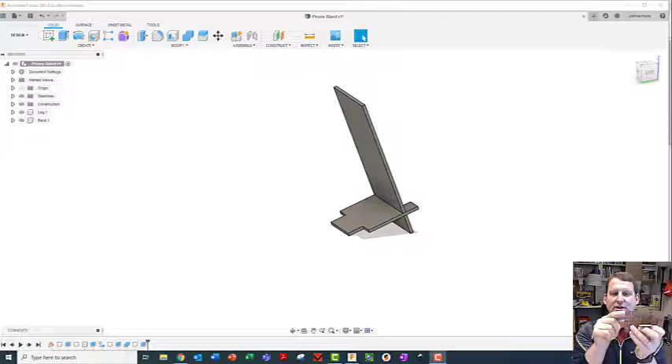Then we'll need to do some roundovers. What we find in real material, especially things like wood, is if we leave really sharp corners around the edges, they tend to splinter and break away a bunch. They're really weak when it's a really sharp corner. So we'll do a little fillet on all of our outside edges to round them over, and that'll make them much stronger and more resistant to chipping. You can see where this leg already chipped off, because it's so sharp - see how sharp that corner is? So we'll have the laser cutter round those over real quick. Some things we won't want to round over more than others, but we'll talk about that in a second.

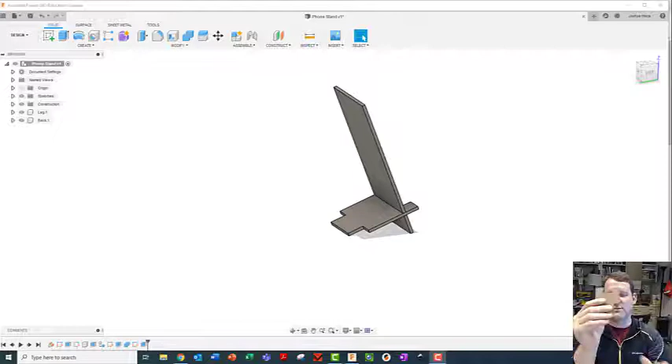All right, first things first, let's go ahead and cut this. Remember, I made this 2 centimeters from the bottom to this slot, so I want to do 2 centimeters from here to this slot too. I want to keep that balanced.

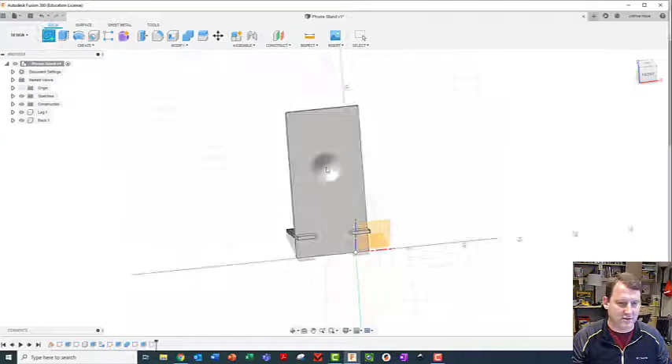So to cut this slot, I want to come over here to my face, create a sketch, click here. I'm going to do a construction line from the top to the bottom, and put my slot on the left - if you want to do yours on the right, that's fine. Notice I didn't actually draw a construction line - I'll hit escape, just highlight that line, and make it into a construction line. Totally fine way of doing things. Notice it's orange because I haven't defined where it's supposed to be yet.

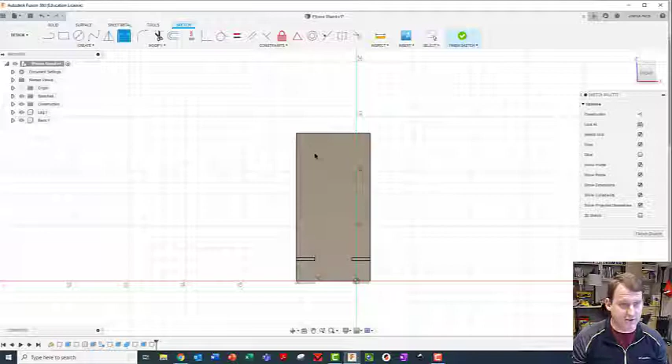So I'm going to use the D for dimensioning tool, click on the line and the side I want to go off of. I'm going to make that 2 centimeters. And that makes me happy. So now that's all lined up.

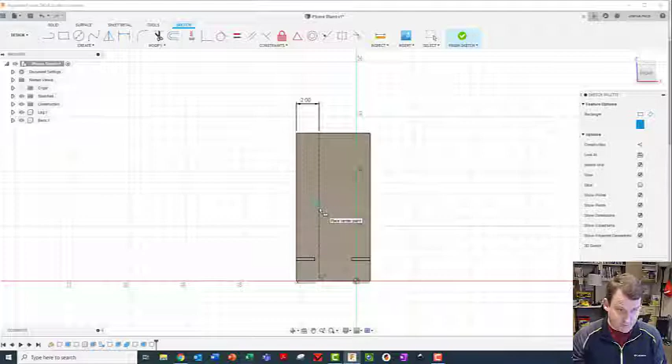I'm going to grab my center rectangle tool, and I want this slot centered on this line. So I'll go down to the middle until I find the little triangle, which tells me the center point. I'll click on it, and drag it up.

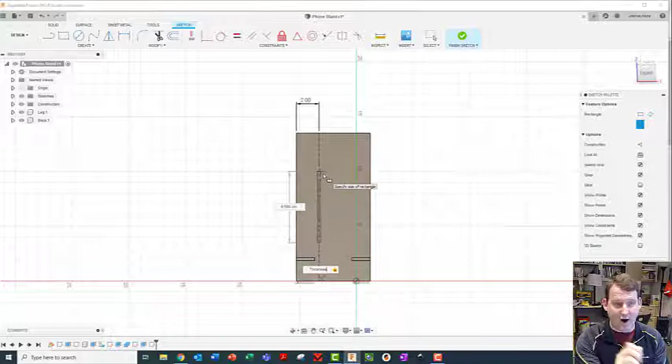Now, I want this slot to be equal to the thickness of the material - that's that bottom number that's blue right now. So I'm just going to type in the word 'thickness'. Again, what this allows me to do is change the thickness later for a different material, and it automatically will change all the slots and make everything just work for whatever thickness I have.

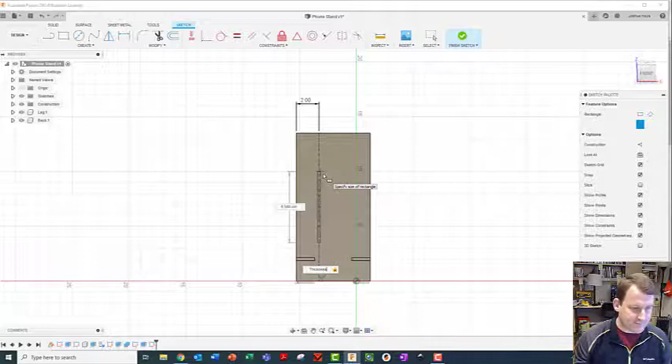And then I want the width. I made the width of this tab 0.6 - did I write that down? I think it was 0.6. So I'm going to make the width of this the same as the width of this. I'll hit tab, and say it was the back width, times 0.6. And I'll hit enter.

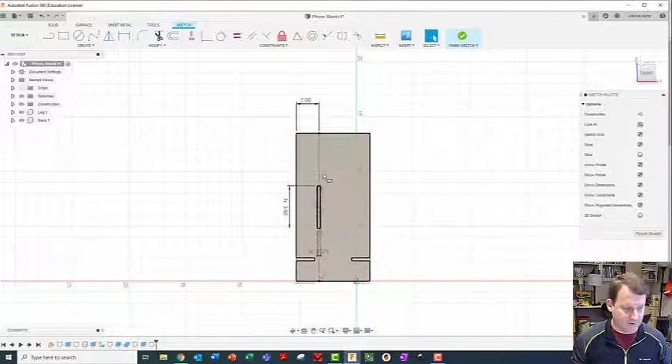Now you might be concerned - you might say, well, what if it doesn't fit because it's exactly the same width as the other one? The nice thing is when the laser cuts stuff out, it actually vaporizes a little bit of material. So the width of the hole is always going to be a little bit bigger than the thickness or width of the material. So it'll actually work out really well, I think.

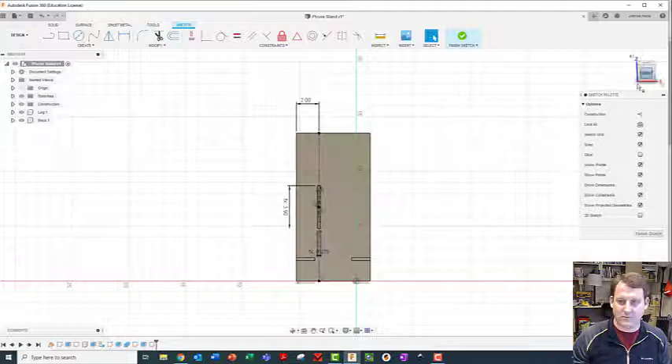Okay, so I have that done. I need to extrude the hole. So I'm going to hit E, select the hole, and push it back in. See how it turns red? That means I'm cutting, and I'm going to say, I don't need to go quite that far.

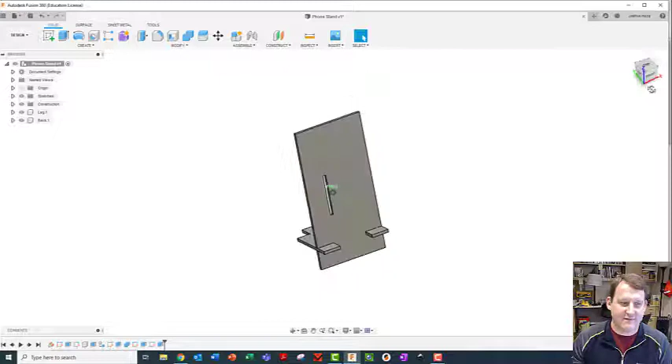I'm not going to get really blown away there, I'm going to say OK, and I've just cut that slot. So now I have my phone stand, and it's almost totally done. All I want to do is take these hard corners on the outside corners and fillet them, round them over a little bit. I'm going to do that right now.

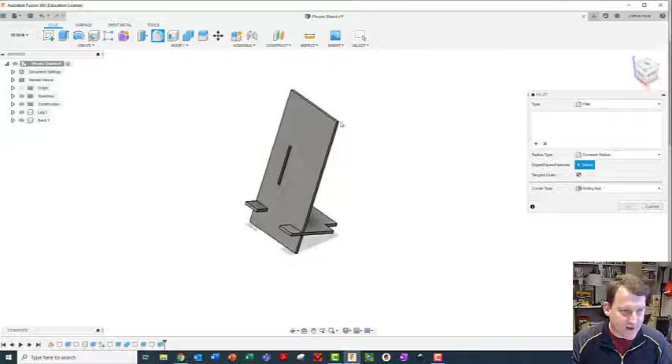I'm going to choose up here on Modify, go to Fillet. I could just use F. I'm going to rotate so I can see this edge right here. I want to fillet this, I'm going to zoom in. I want to round this over. Notice it has a little push arrow so I can round this over as much or as little as I want. I'm going to choose that quarter centimeter. You can choose more or less, it's just up to you.

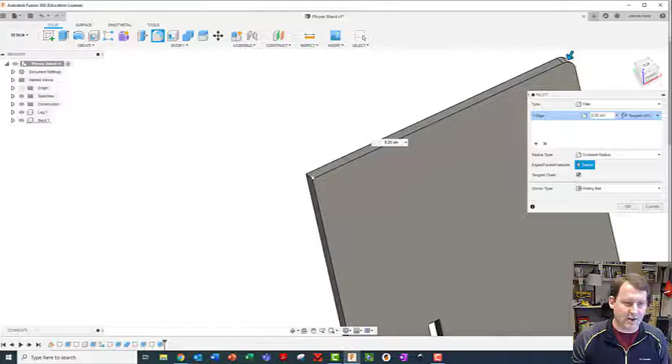What you need to do is just knock off a little bit so that it isn't quite so sharp and it won't chip up and damage as much. So I'm going to come over here and click on this edge now. Whoops, I'm going to Control Z, undo that. I did not want to click that quite yet.

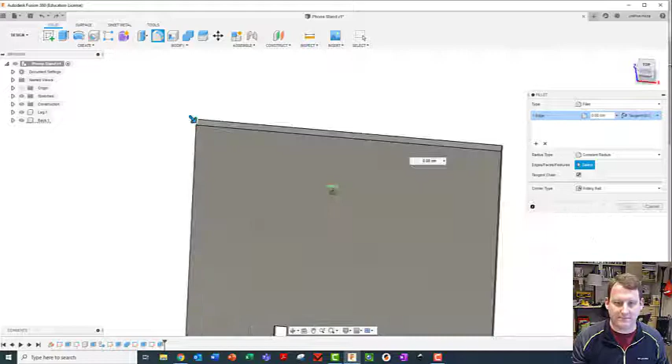Modify, fillet. I'm just going to come through here. I'm going to select them all before I put a value in. So I'm going to click on that one, click on this edge, zoom out. I want to do this bottom edge here. Whoops, right there. If you click on something that's wrong, like if I clicked on this on accident, I just click on it again and it goes away. All right, so I can do that. I'm going to click on this edge here.

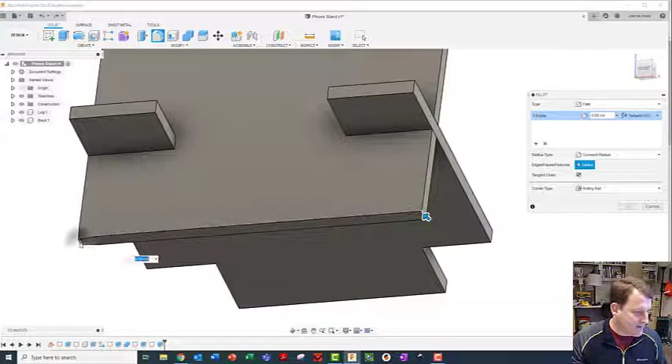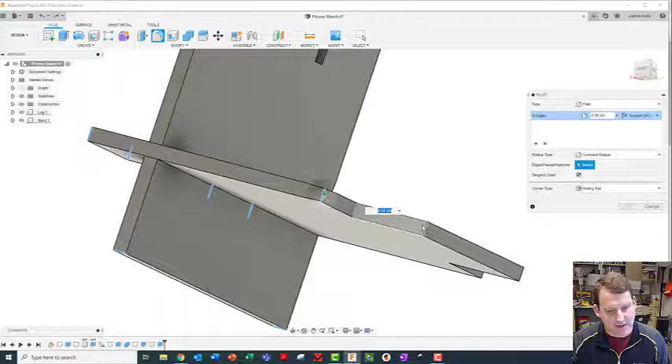Now I don't want to round over these edges because I like this idea that it's a nice smooth line through here. So I'm not going to do those, but I do want to do this outside edge, this one, and the back of the leg as well. So I want to round over this outside one, this one, that edge, and then one more right there. I don't want to round over any inside corners, so this corner I don't want to round over. That would be a bad thing, it would make it not sit flush.

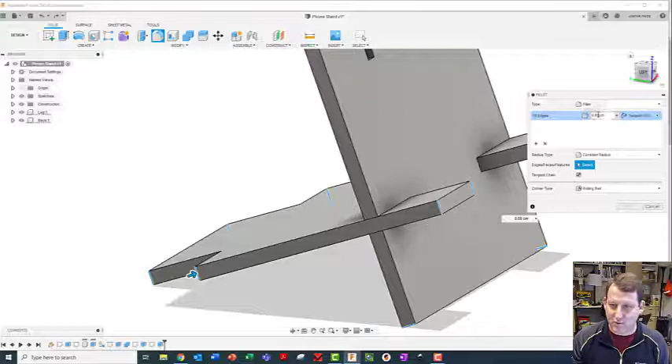And then I'm going to make sure I think I got everything. If I didn't, I'll get it later, but I'm going to give it a value, and I'm going to use that quarter centimeter. But again, it's really just looks, so it's whatever you want it to be. I'm going to click OK. I think that looks pretty sharp.

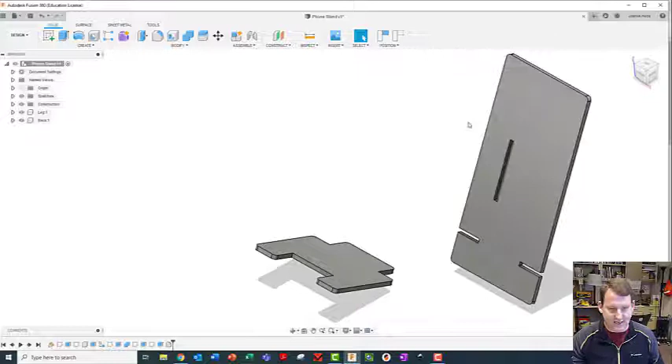I'm going to hit my home button, make sure that all my edges are rounded. So, whoops, I just moved that - I just moved it and screwed it up. So instead of trying to get it back just right, I just go Control Z and keep going until it goes back. I'm totally fine doing that. Okay, so yeah, I think that's all rounded over nicely.

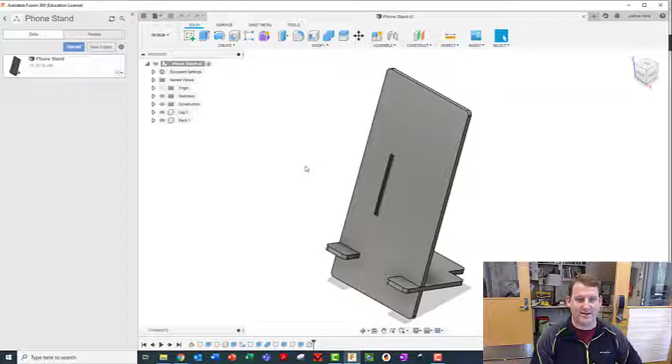All right, so that's the major part of the model. Now it's for you to add your own details. So, I don't know, maybe I'd want to do something else to my stand. Maybe I want to cut a hole for decoration or something. I want to just mess around with some stuff.

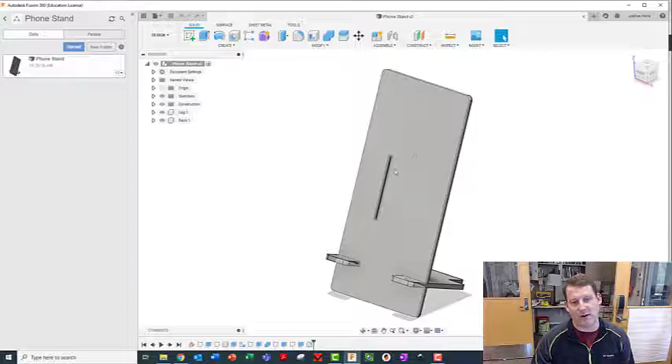Or maybe I've got one of those PopSockets on the back of my phone, and my case has some thing on the back of it that's going to get in the way of it sitting flat. So I might want to cut a hole for that. Make sure you don't make anything really thin. So if you were to cut, say I were going to cut a hole for something, and I made it like the hole was this big, and I extruded this hole out.

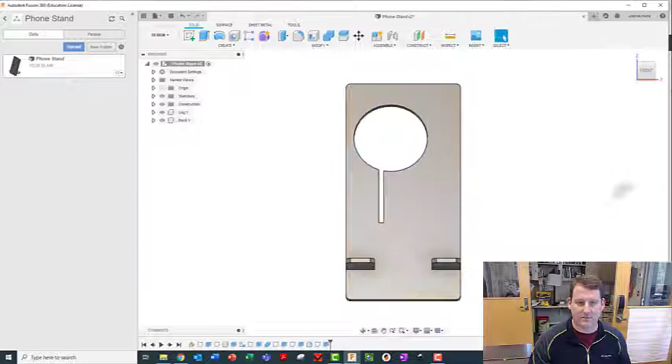Notice that's going to get in the way of this working well, and this is going to be really weak and break really easily. So just be careful as you're messing around with more stuff to not make anything too thin so that it gets weak and breaks easily.

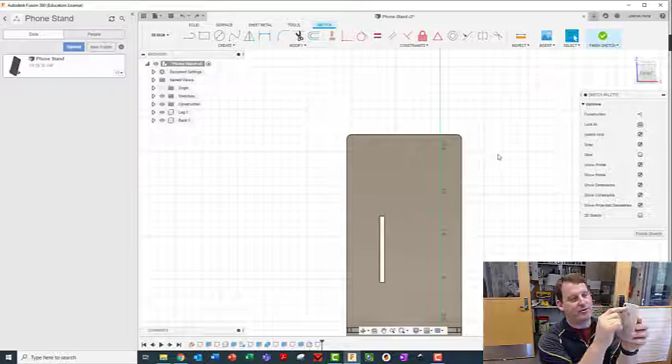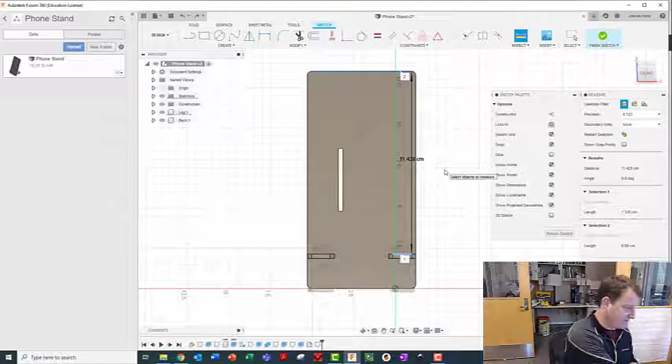Also, my phone works out. I measured this earlier for my measured drawing, and this is just over 12 centimeters from here to where my little lens is. I can do a measure distance real quick, from this line up to this line, and see that it's 11.428 centimeters. That might be close. Let me check mine - yeah, mine is 12.3 or something, so I've got an extra centimeter, and it's going to come down to right about there.

So I don't need to do this cut. Maybe though you need to cut a hole because maybe your cameras are bigger. You may need to figure out a way to lop off a corner here or something.

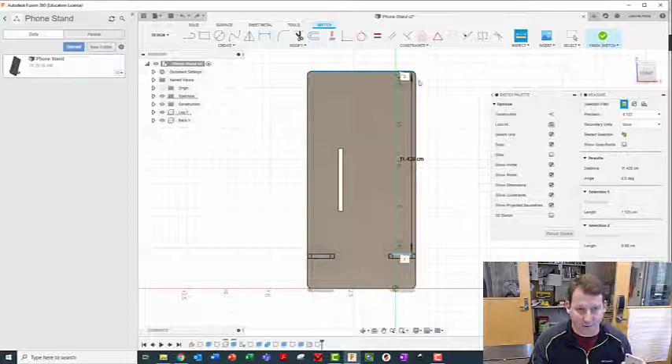Also, what I might want to do is come here to the center of my bottom, and cut a little half circle, because when it's sitting here, maybe I want the cord to be able to come down and go back behind it and escape out the back, to look kind of slick. Maybe I wouldn't, so I might do that.

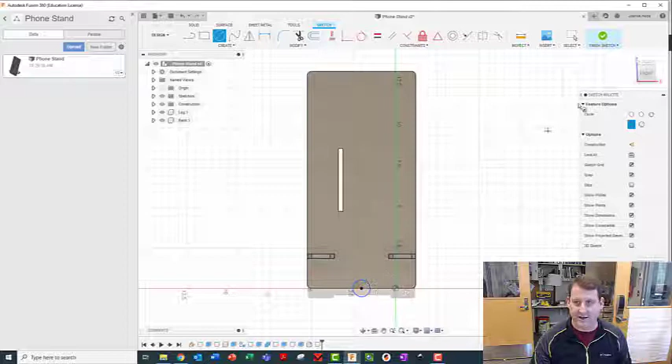As I zoom in here, I'll show you a little neat technique. Hopefully I can do this in this mode. I'm going to hit the fillet button here - oh, nope, it's not going to let me grab it, so I have to have another line here to do that with. I'm not going to worry about that right now.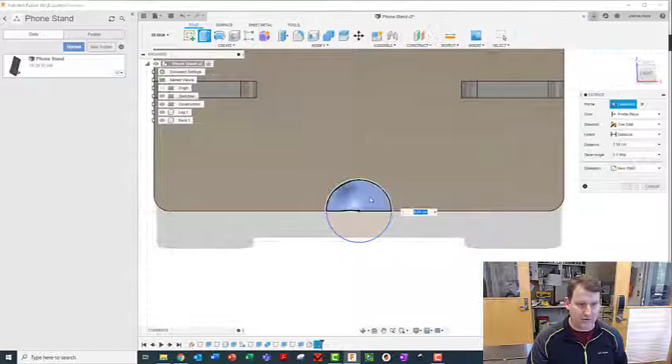So then I'm going to use the extrude tool, and I'm just going to extrude this and cut it out. Right there is good. It says cut, it's all ready to go, boom. Now I don't want those sharp edges just like before, so I'm going to need to fillet those real quick.

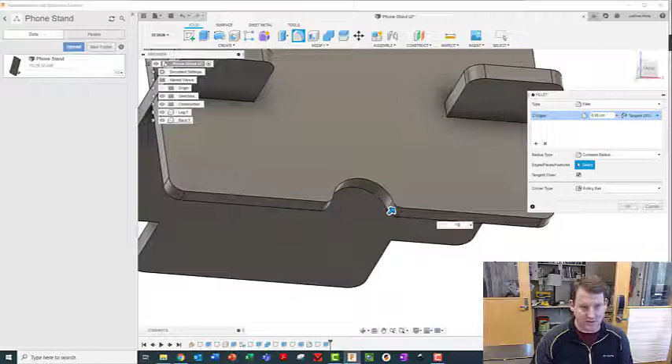I'm going to use my fillet tool here and here. I don't need much of a fillet, I might just go with 0.15, a little less than the other ones, and then click OK. Now I've got a little place for the cord to pass through, which is kind of fun, right there. Maybe that's too big a hole, maybe it's not big enough - I can play around with that and change that if I needed to.

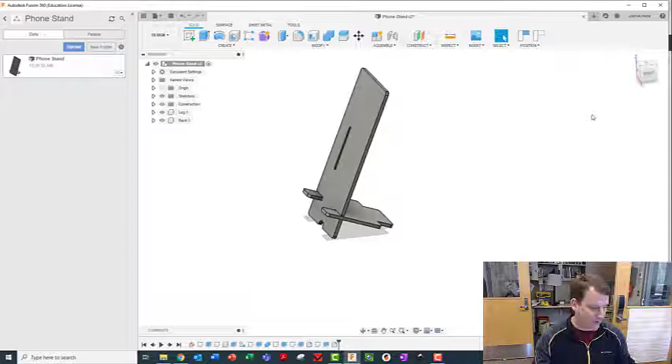So this is the point where you're going to do what you need to do to your model to make it your model. Don't worry about pictures - we'll add images and engravings if you want to do that in a separate program. If you put a picture on here, it's not going to export anyway, or at least I don't know how well it will export. You can always try it and see how it works.

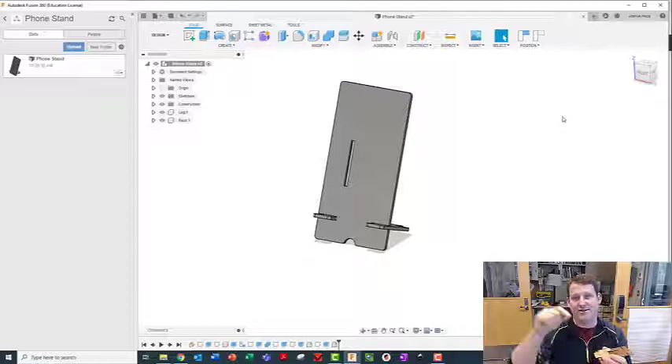All right, that's it for the video. In the next video, we'll learn how to take this model, break it apart, flatten it out, and arrange it so it's ready to laser cut, then how to take the Fusion 360 model and create a PDF that we can send to another program. In that program, we'll learn how to add decorations like pictures and even our written name or signature, and then how to use that program to export it straight out to the laser cutter, and then we're just cutting and going. So we are close.